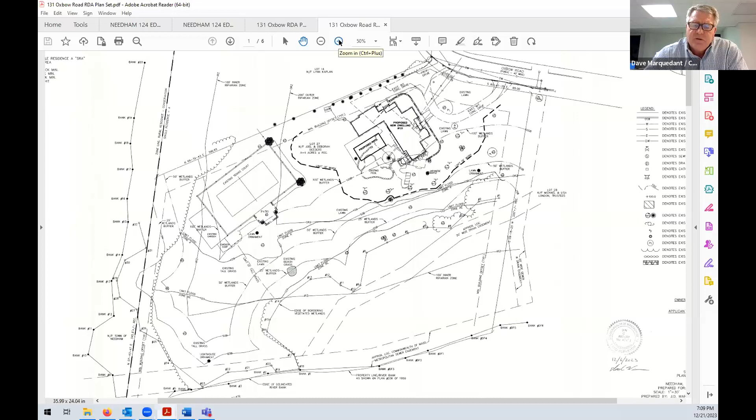Perfect. A little ear, 2 little ears of the home right there, and right there is in the buffer zone. We have a little hot tub and a little bit of the patio for the new fire pit. So we're removing the pool, the shed, and the home out of the buffer zone and moving it back to 93 feet, minimizing our impervious surface inside the buffer zone.

Outside, our limit of work is kind of that heavy poly line right around the tennis court area. You can kind of see, there we go. That's our limit of work and our erosion control. Our limit of work is 51 and 52 off the wetland, so we're outside the 50-foot buffer. We're outside the outer riparian zone, and we're outside all of the flood zones.

So we're looking to remove 3 trees. 2 of them are right up against the edge of the house on the southern side of the existing house, right next to the retaining wall. There's 2 there, and then the third one is a little bit north of that, closer to the buffer zone - right there we have a 12-inch apple. We're replacing those trees with 6 trees closer to the limit of work.

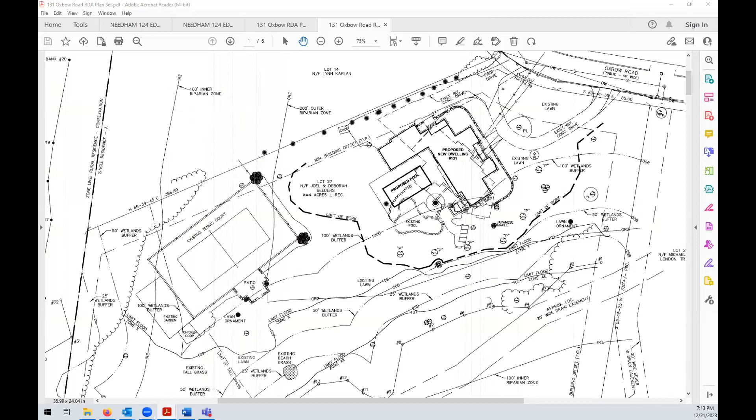Well, I think it is subject to our jurisdiction. It's a question of whether the small amount of the project that is within the 100-foot buffer zone is really going to have any impact. We can decide whether we want them to submit a notice of intent more formally, or that they presented enough information and we can conclude that the impact might be minimal and that a notice of intent is not necessary. So I think that's within our judgment.

I think as well, some of the conversations we had when this was in the development stages were that the work being done within the buffer zone is where existing structures currently are, and they're essentially pulling them back. So it can be seen, if you see it that way, as a net improvement - taking an existing house and rebuilding it further away from the wetland and returning that to pervious, landscaped areas.

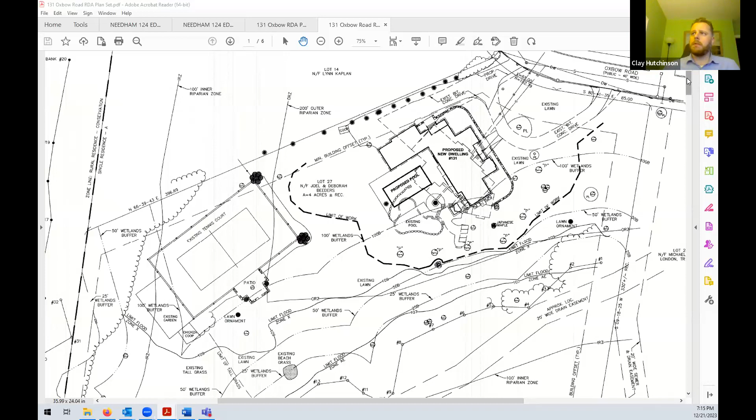I think some of the other sheets may demonstrate a little bit more clearly what's existing. For example, this is the existing house, the existing pool, and the existing shed. And then the new structure - this one's fairly busy as well, but you can see the new structure is back here. So this existing portion of the footprint is being removed. Here's that 100-foot buffer zone line out here, as well as the shed and the pool being relocated, primarily the existing pool being relocated outside.

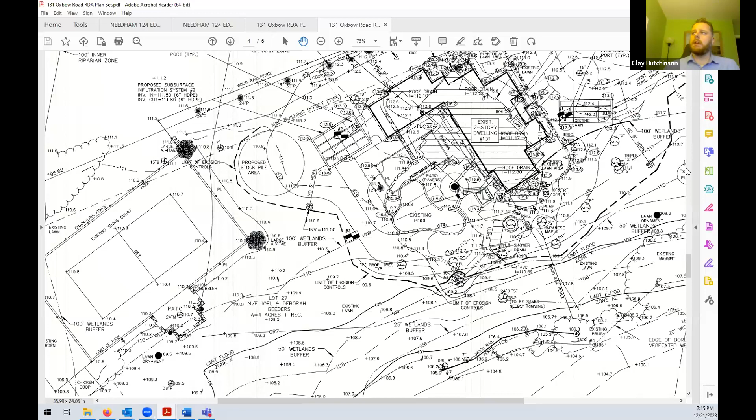There we go. Yeah, good, thanks. Peter, do you have any comments?

This strikes me as a lot of work, to be honest, because there's going to be tree removal and tree planting, and then grading, and even though everything's being moved back, there's a significant amount of disruption associated with taking things down. So I wonder if this really is a case where we can just give them a negative determination of applicability that says go ahead and do it, and we're not going to check on it in the future. I don't know, it seems more complicated than the typical RDAs we see.

Let me ask the applicant, is there in fact going to be grading within the 100-foot buffer zone area? Yes, right below that hot tub is contour 115, and we're bringing it down to 110. So those contour intervals are 5 to 1, 8 to 1, 8 to 1, and 10 to 1. We think it's manageable.

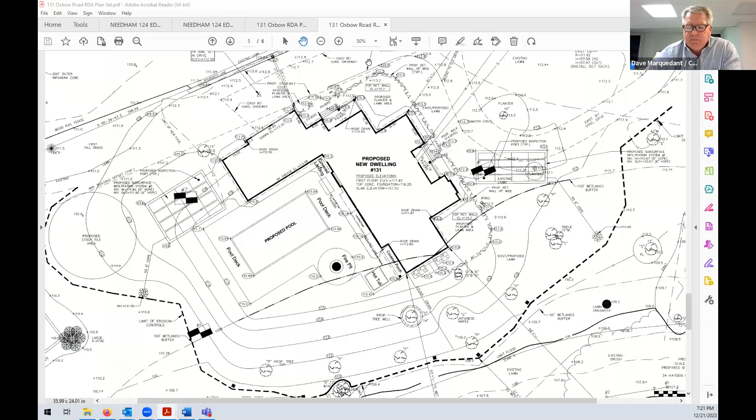All right, Polina, do you have any questions? How many trees are coming down again? Three trees. Can you point them out to me again?

There's two trees right to the bottom of where the AC pads are, adjacent to the retaining wall. Those are currently sitting up against the existing home. And then we're looking to take out an apple tree that's up closer to the recharge units, very near the buffer zone, a 12-inch apple. And then we're proposing six down below.

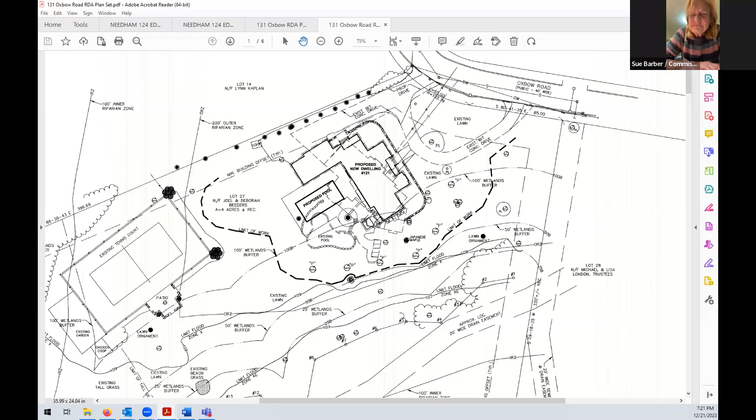Which of these trees are in our buffer zone? Well, all three of those are in your buffer zone. Okay, and then we're also saving a couple trees in the middle of that slope. There's a Japanese maple and another 14-inch tree that we're going to build a tree well for to save. So we're cutting three, adding six, and saving two.

I personally think this would be fine as an RDA. I know they're doing a lot of grading, but if you put a condition that says install erosion controls, make sure they are at the limit of work, and have conservation staff inspect them prior to any start of work, and have a pre-construction meeting just so everyone's on board. I guess I don't see it as the site's going to go out of control just because this is going to be somebody's dwelling. So they're going to make it look nice and clean it up. And even with NOIs, staff doesn't always go out there and look at every single project. They just look at it after the fact when a COC comes in. So I'm okay with this being an RDA, as long as it has certain conditions attached to it.

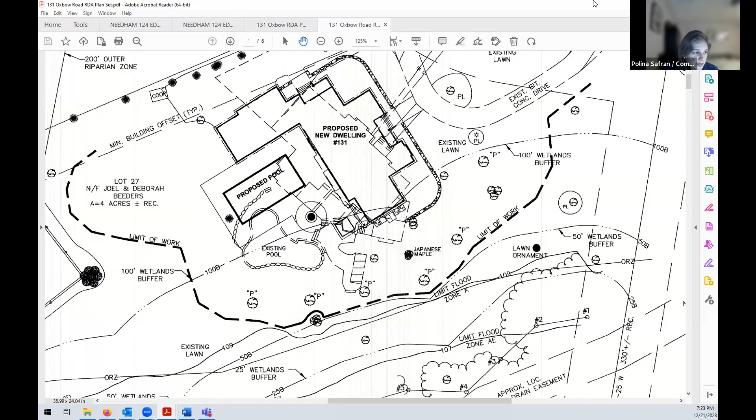And maybe one of them would also be to have proof from a nursery submitted to conservation that they have obtained certain trees and then notified conservation, so conservation can go out there and either Clay or Debbie can inspect to make sure they're installed as proposed. But that's just my opinion.

Okay. I looked at the drawings, I looked at the drainage calculations, and I concluded that it's all very well done. I believe that the drawings don't really indicate the extent of the grading unless you're an engineer and you can look at two drawings at once. There wasn't really a grading plan that showed how the existing grading was going to be modified.

But I'm kind of mixed. I believe that we probably could have some oversight on this as an RDA, but I think some of the other commissioners are leaning the other direction. I see that Sue just came on board, so I'll ask Sue if she has any questions.

Yeah, I've been here. I had trouble getting in. Sorry. I do have a question.

I just want to make a comment that I tend towards Peter and Allison, that I think it is too complicated for an RDA, that it should be an NOI. I don't remember an RDA in the past as complicated as this. I think it's kind of a classification of an NOI. Okay.

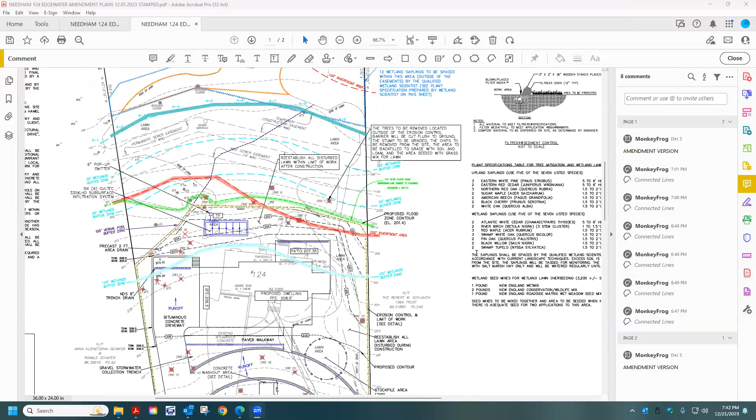I feel like if we're agreeing to let you remove more trees, are there any other trees anywhere you could save elsewhere? It seems like you're removing a lot of trees from the site.

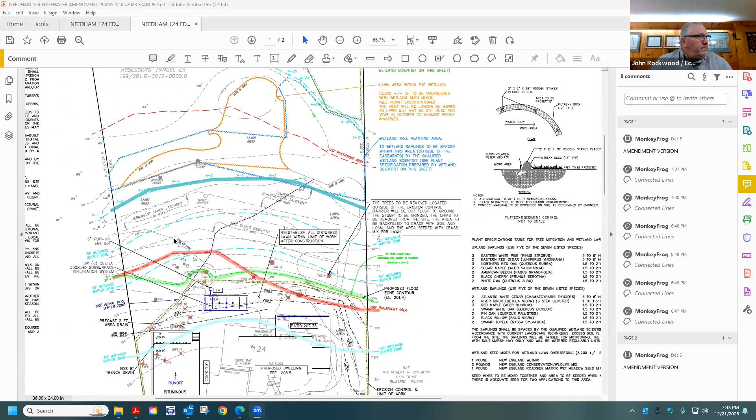Basically, here's the river here. It's forested from the river pretty much up to this point, so this is all wooded here. This is all existing lawn, and then there's just scattered trees around the existing house. So there's a significant portion of the lot here that's all wooded.

We're proposing to plant additional saplings to basically get an understory going under some of the larger trees here, which in the course of the next 20 or so years are going to fail and fall. We're trying to augment and make the forest in this portion of the site more diverse and more sustainable.

I don't know if it's appropriate to come off mute and share, but we had two fairly large pines come down this past Monday in our neighborhood, which was just pretty scary. It was the tops of one of our pines, and a neighbor's entire pine from the root system went down. So they're just older pines.

All right, Reed, do you have any other comments? No, I guess nothing else at this time. I'd like to hear what other people have to say. Okay, Peter?

Yeah, I do remember the discussion we had before, and I remember feeling conflicted about it at the time, but I think ultimately we were persuaded that given the condition of these trees and the depth of the soil and that sort of thing, that this was reasonable, and then the mitigation was actually something that would help the situation.

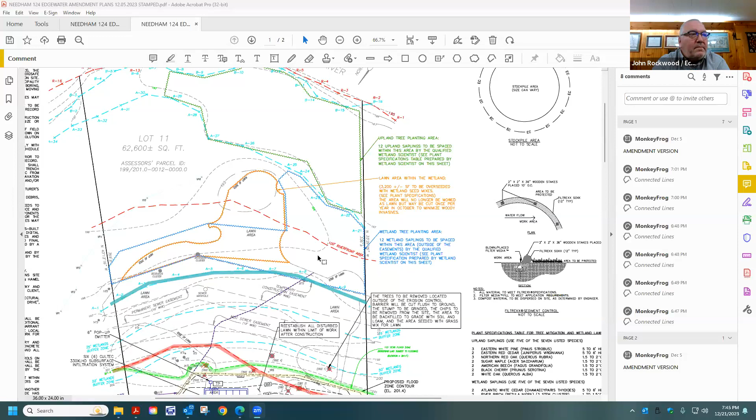Polina? I don't have any questions. Okay, the chair doesn't have any questions. I think it looks good. We're all concerned about trees, but it's hard for us to say that a tree that's deemed a hazard tree can't be dealt with. So I think that you're following our guidelines as far as new saplings. I think that's great. So if there's no further comment...

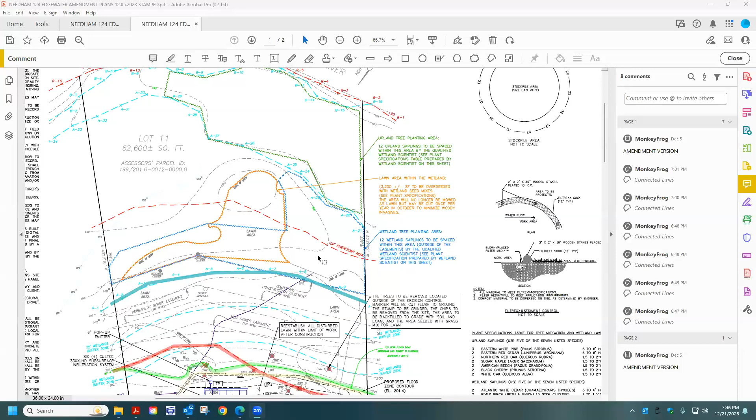Actually, I did have, anybody else? This is Andrew Marr. I just want to say thank you guys for taking the time. This week was a very, very scary week for everyone in Needham and in the Edgewater community. So I appreciate everyone's understanding and having the conversation here.

Any comments from the staff? Clay or Deb? No? Anybody in the audience? There is one hand raised in the audience. Okay.

Hello, Merry Christmas to everybody. Hi.

Okay, my question is about wildlife and nature and about trees. Trees are Mother Nature's habitats and nature, and it involves all of us when we need soil and water to live and breathe. And when people cut down trees, that harms Mother Nature. Mother Nature is always good to be protective, and it could also remind me of my mom when she passed away in February, that she had 3 wonderful kids, and she had 3 wonderful jobs, and she was a hard-working mom, and we are all blessed by my mom that she always had a good smile on each of us' eyes and lips, and we couldn't believe she's not here during Christmas time. And that is sad for me and my brother who is in Sacramento, California.

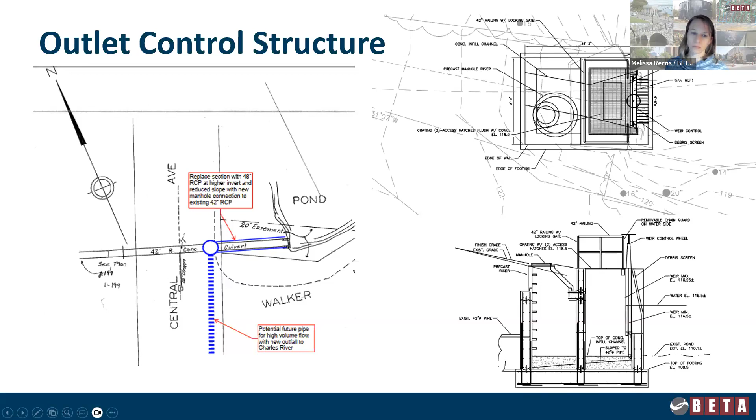As far as the in-water survey and data collection findings and recommendations, Water and Wetland was a sub-consultant we used. They're professionals in pond management. They did an aquatic assessment memo, looked at the vegetation they found in the pond, and we included their assessment memo as an appendix to our report. We've also provided a treatment alternatives analysis, that's appendix C of our report.

It goes through many different types of treatment alternatives for the different issues we found going on in the pond. The first thing is nutrients. We did identify that phosphorus levels are high in the water and in the sediment, so nutrients are an issue, and we'd recommend those be addressed through phosphorus filters at the inlets, and also addressing external loading through BMPs the town is already working on outside of this project.

The other issue the pond has, and that the data shows, is very low dissolved oxygen, to a point that it's really not healthy for fish right now at all. It's below recommended levels, as it was a few years ago when ESS did their study as well, and it's continued to stay extremely low. To address that, the recommendations are vegetation removal, which will help address dissolved oxygen, and then once that's taken care of, potentially installing some mechanical aeration in the pond to increase oxygen levels.

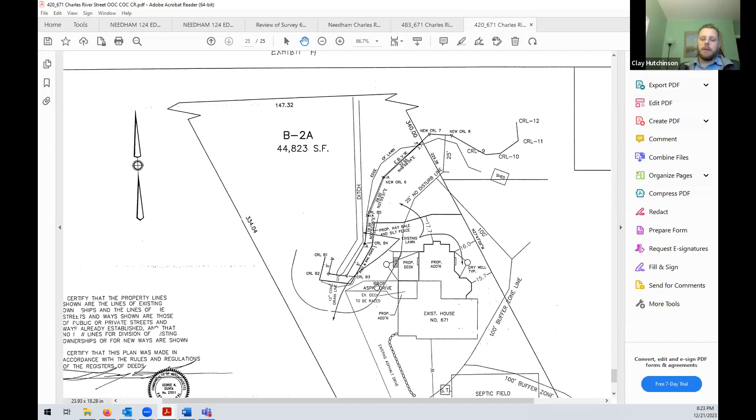There were some modifications proposed, or given, in order to do the additions. There was a conservation restriction that was approved and accepted, and this is all part of a closed-out project just prior to the hot tub project. But they did install plantings, acquired a conservation restriction around the ditch of the brook, and modified their driveway to change runoff so it wasn't just immediately discharging into the stream. So that was closed out in 2005.

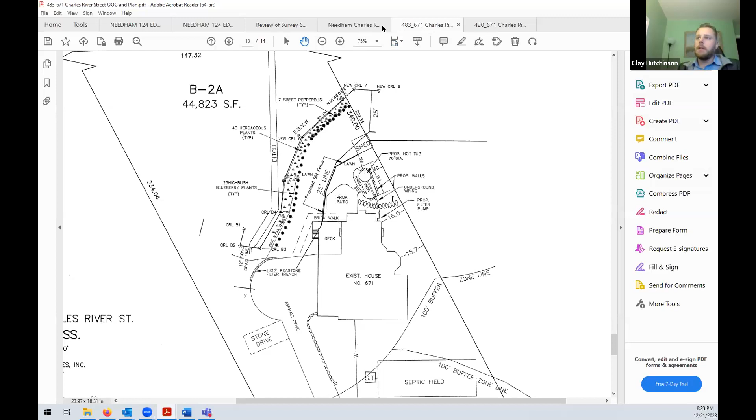In 2006, they came back to propose a new patio and a hot tub, both outside the 25-foot buffer. It was a much simpler project because the addition was closer to the wetland previously. It came before as a notice of intent. As Jeffrey mentioned, it had been a while since this was conducted, so we did have him go back and hire surveyors to come out.

They provided the as-built plan and detailed the deviations. The review of those deviations essentially stated that the impervious surfaces, or the footprints of the patio and the hot tub pad, were reduced from what was proposed, and it was actually moved further back from the wetland edge than what was approved.

There were some differences to the small 1.5-foot retaining wall. I believe on the original plan it was essentially encompassing back here, but the final had just a 1.5-foot raised patio for the hot tub here. Aside from that, there were no major deviations. The minor deviations pulled it further from the wetland and reduced its size. There was no change to natural vegetation—it was all done within existing lawn area, so there were no tree removals, no new plantings.

Upon review of this project, we did confirm that the required split rail fence around the conservation restriction is still in place. The plantings from prior to 2005 are still a wild, untouched area now, so they're still in compliance with the previous order. At this time, staff would recommend issuance of a full certificate of compliance for the hot tub and patio portions. All right, thanks, Clay.

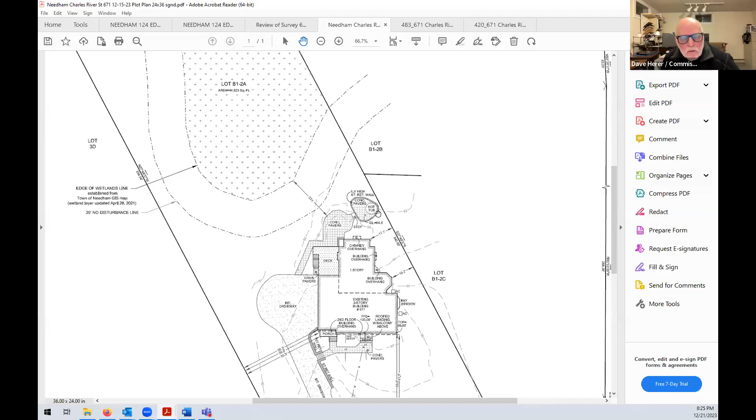Any other commissioners have a comment? Raise your hand, or... No comment. Yeah, it seems pretty straightforward.

Anybody? No? Thank you. Okay, so could I have a motion to issue a certificate of compliance for 671 Charles River Street, DEP file 234-483? So moved. Second. Okay, let's vote.

Sue? Aye. Reed? Aye. Peter? Aye. Allison? Aye. Polina? Aye. And the chair votes aye.